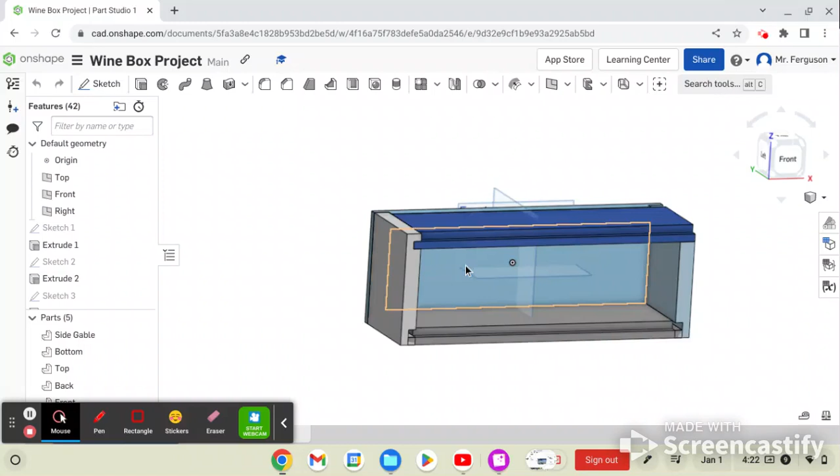So now that we've built all of our parts, we need to assemble our project together and make our assembly and then plan drawing. Let's go ahead and open the assembly tab down at the bottom. It's going to look like a new project, but it's just another tab.

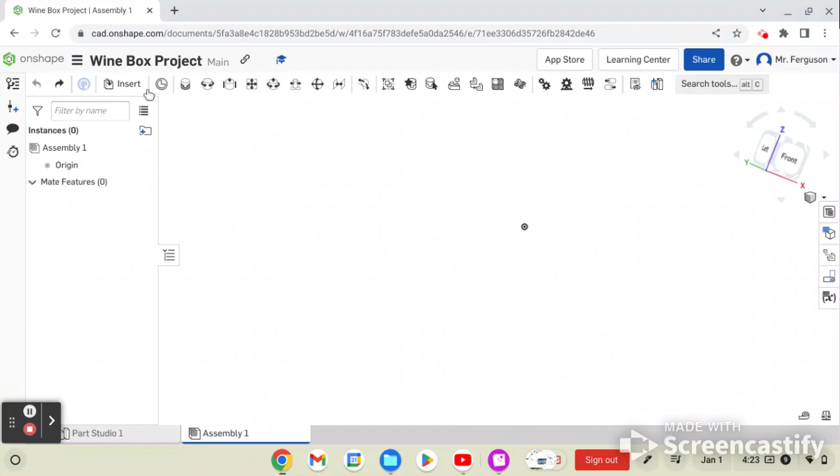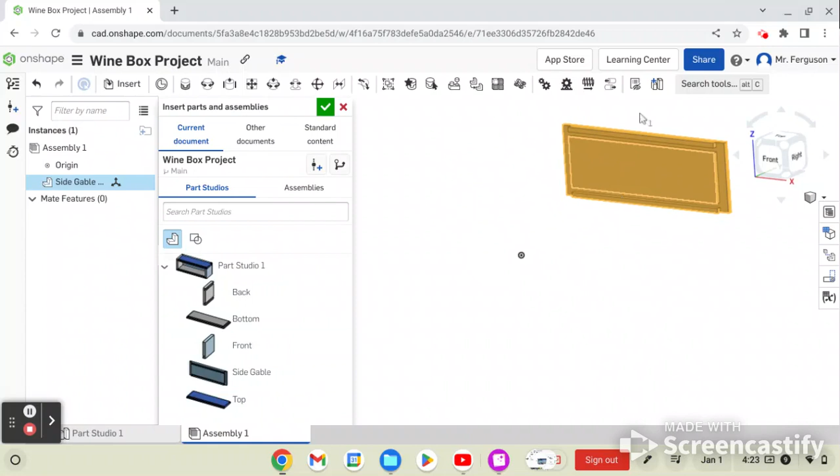To start with this, we'll go Insert, and then you will see all of our different parts we built. So we have our full part here that is from Part Studio, but we want to just manually click and then input them into this drawing. So I clicked once on the side gable, then I clicked again in there, and then I'm going to do another side gable. Doesn't really matter where you put them, space them out a little bit, but in the end, no big deal.

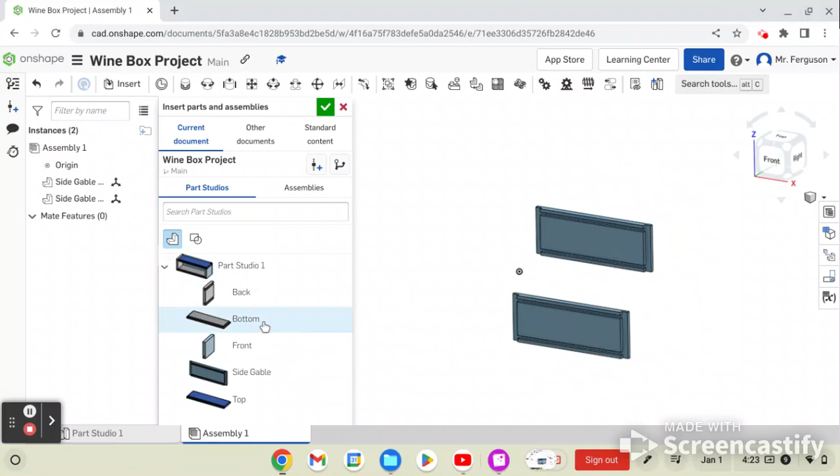So 2 side gables. I'm going to need a bottom. I'm going to need my top, back, and front. So now that we have them all in the assembly, we can go ahead and click the green check mark, and then we can start assembling them.

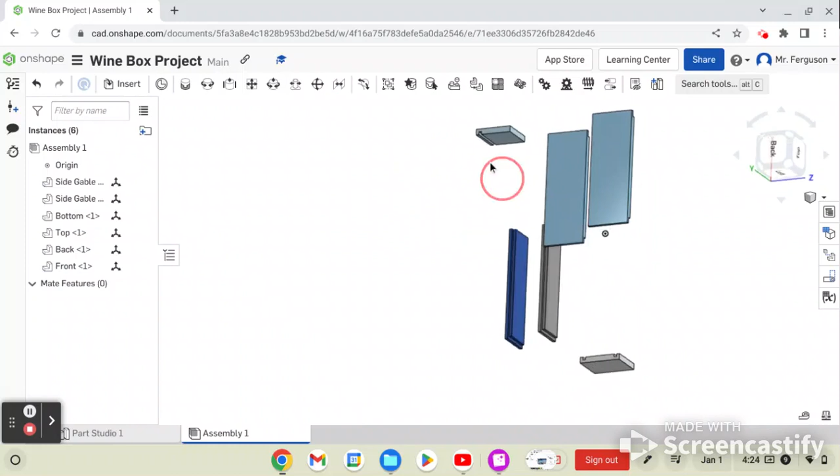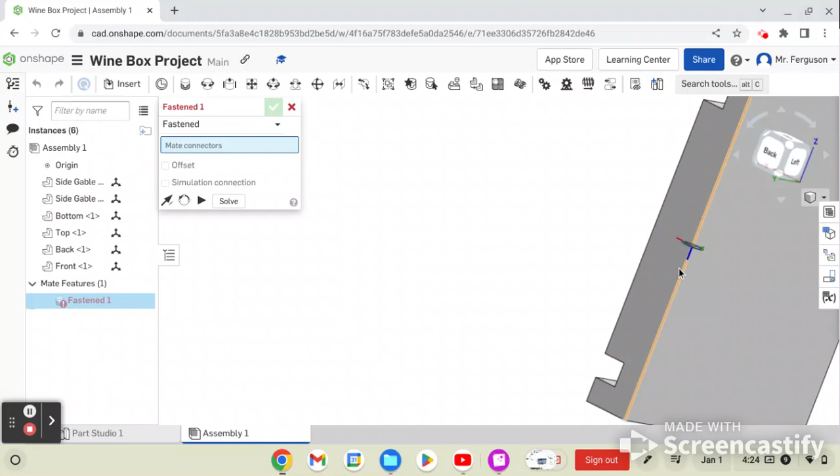So I'm going to start with assembling the side gable to the back piece. To do that, we click on the Fasten Mate up in the top left. It'll drop down that menu, and it's going to want you to select a point where you're going to fasten. So what we're going to do here is select exactly the center line. So that is the center line of our piece, or the center point. But we're going to want to make sure we're on the edge and not in the middle. So you can see that this has been selected on the edge and not there.

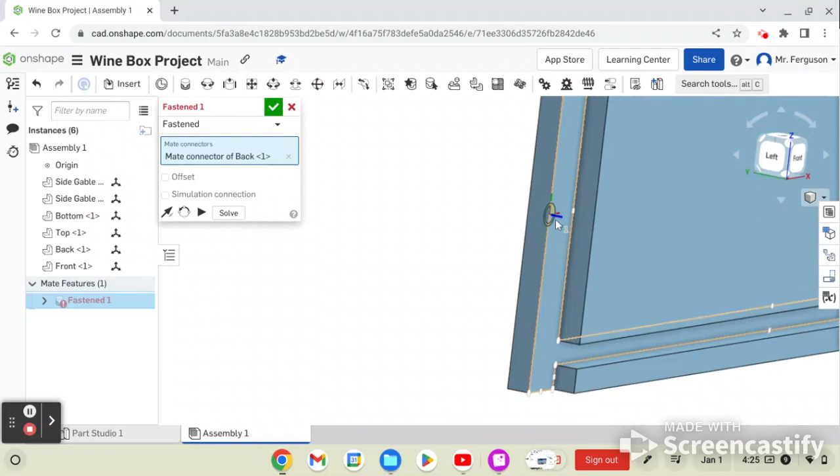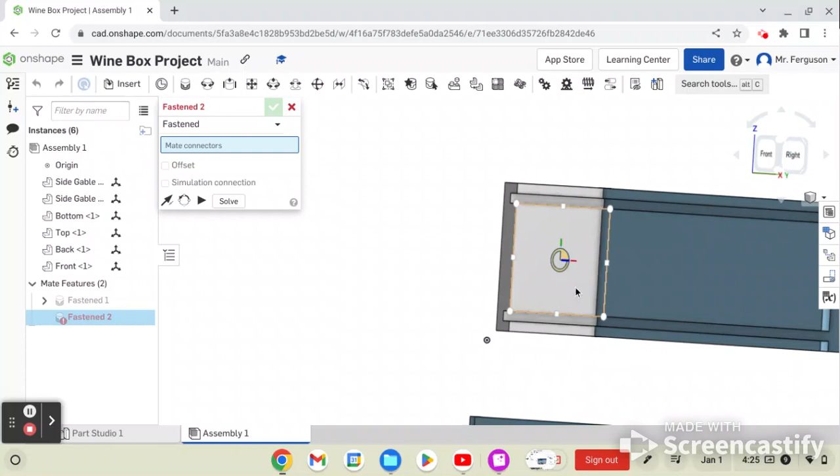So we're going to just zoom out. We're going to go up to our side gable, and you'll see that the same options pop up for this one. So we don't want over there, we don't want anywhere down here, we want this same edge, and then we click there. So that will bring both of our pieces to the center points, and with them being the same height, that equals the same measurements all the way around for our grooves and our rabbets. So that's our first one. We can click X. Second piece, let's do the top.

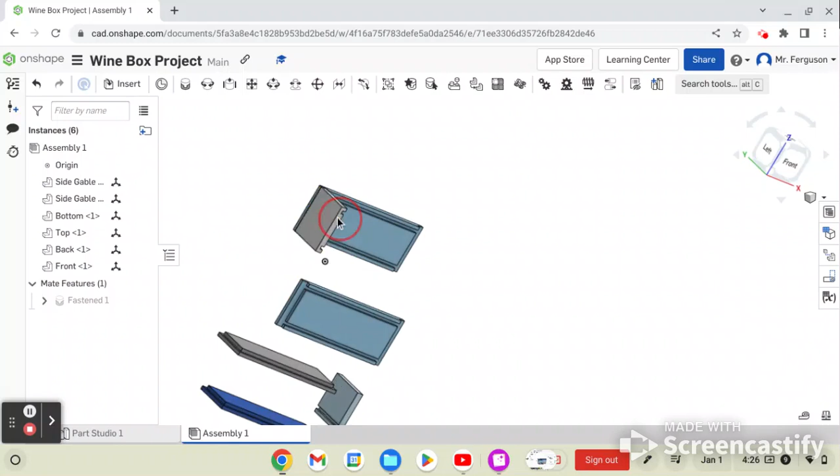So for this one, it'll be a little bit different. I'm going to go around. I'm going to want to connect it to the back part. So I'm going to go over here, click Fasten Mate again. And then I'm going to go directly in the middle of the top. But we're looking at it from the top view, so it's the bottom, but the middle part of it. So I click that once right there.

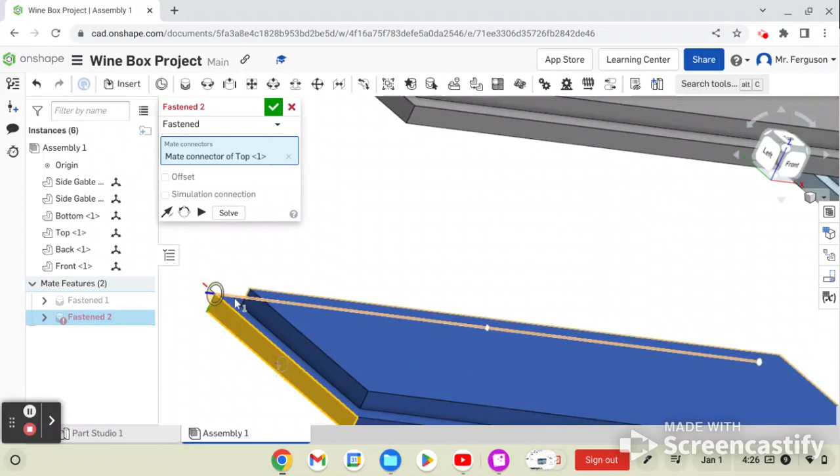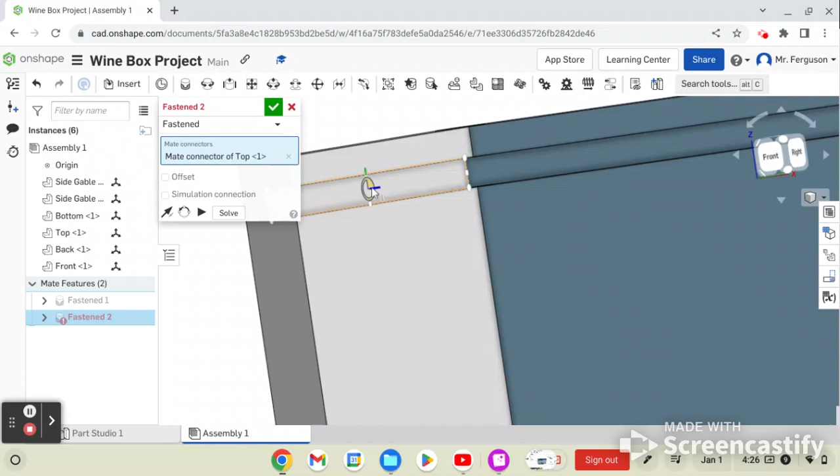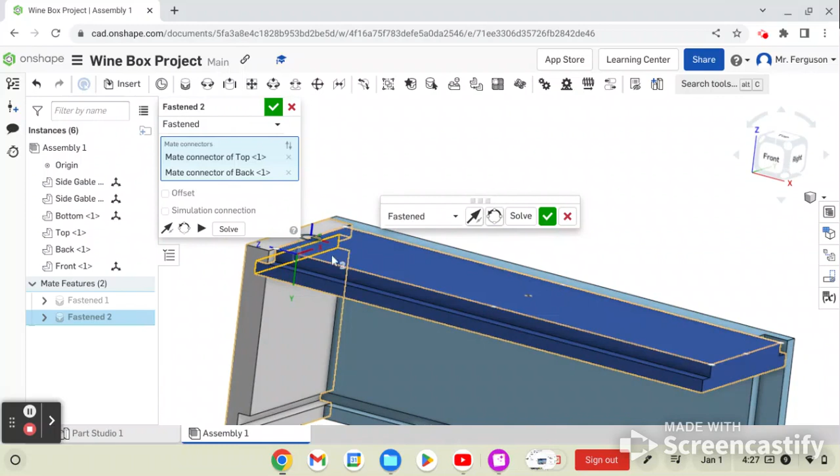And then going up to our back piece, we're going to find the same point to connect it to. So there is our center point of our piece, and it's connecting to the same face we want it to connect to. So the blue arrows both stick out to each other. So I'm going to click that, and then you will see that our lid fits perfectly inside of our side gable and our back piece. So there's a lot of just messing around and trying each face to try to get it to fasten together, but this is the fastest way that you're able to build your projects here.

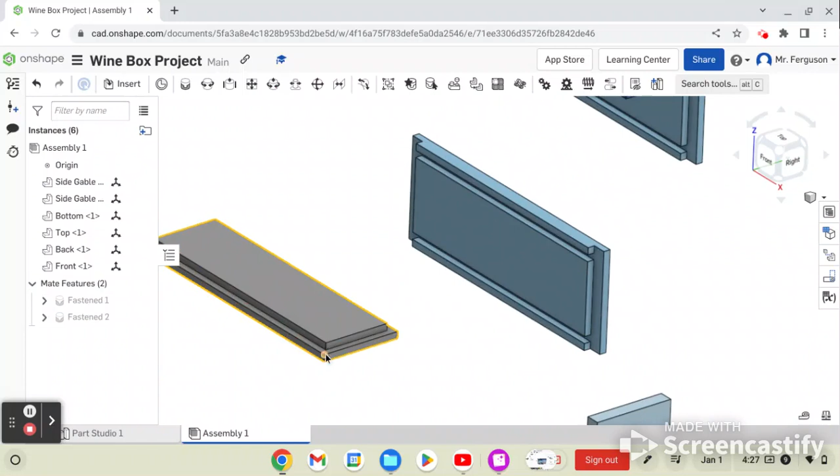So I'm going to do the bottom piece now. So I'll get out of that, click check mark. What's different about the bottom piece and the top piece is that I need to rotate this piece. So this edge here fits into our groove over here. So what I need to do is click on it, and then you'll see that you have all these different arrows and different commands here.

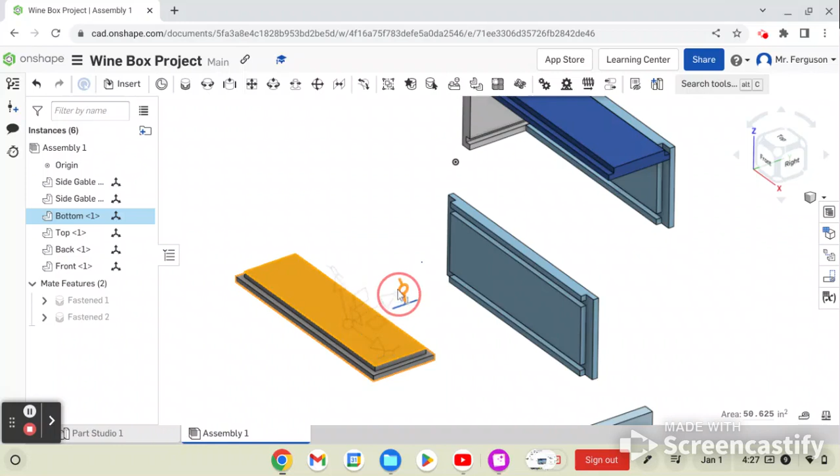So I'm just going to grab this. Looks like a circle with 2 lines on it. I'm going to drag it. I'm going to hold my mouse on it, let go, and then I will enter 180 and enter. So that's going to rotate it 180 degrees, basically just flipping it upside down. So now that we have that done, we can click out of

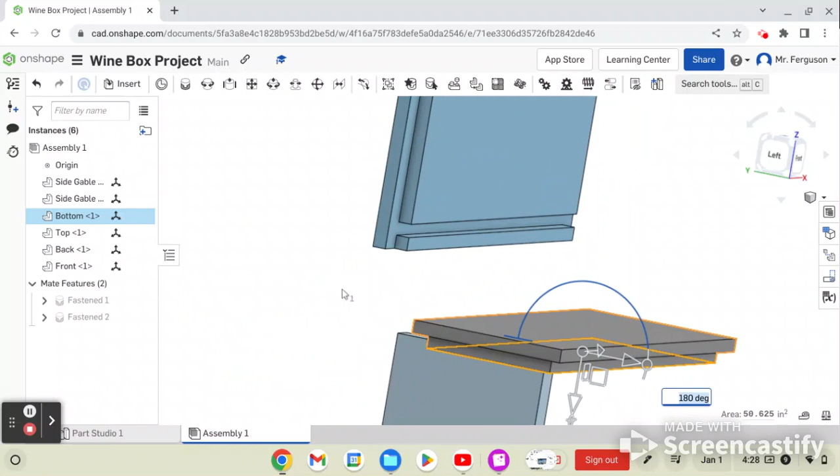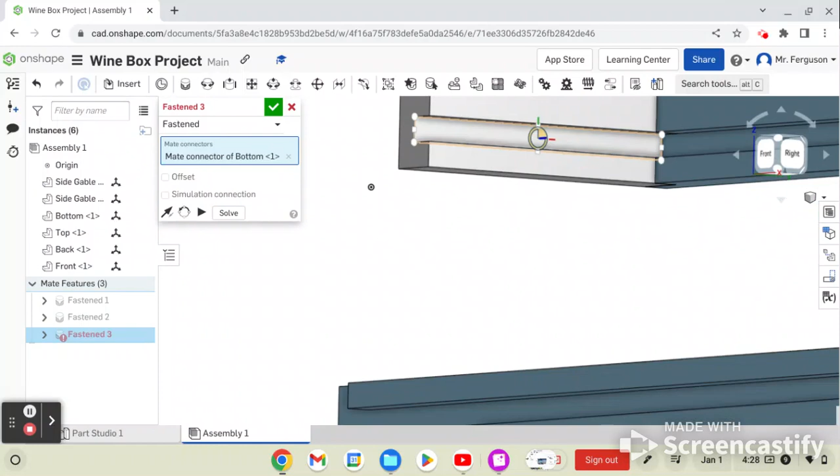the selection, go back to Fasten Mate, and select the middle of our top portion of it. By doing that, it's going to tell Onshape that we want to connect these 2 pieces to the centers and those 2 faces to each other. So as you see here, now when we look on the bottom, everything is flush and flat, and it's not the opposite way where when we built it, the pieces were flipped upside down.

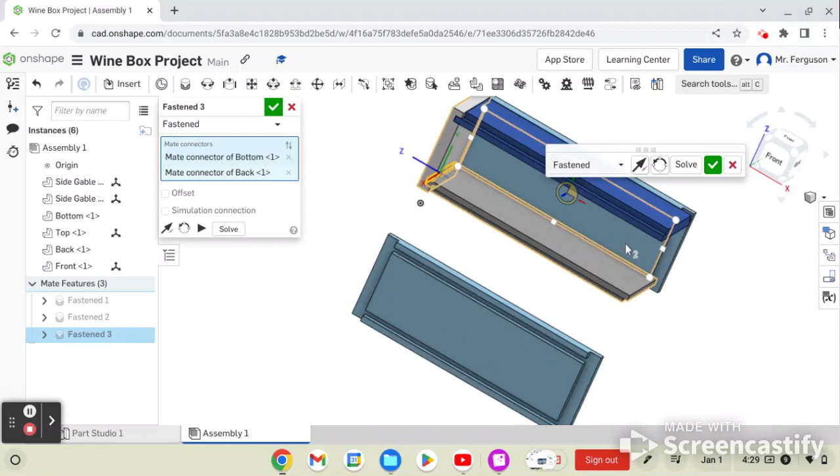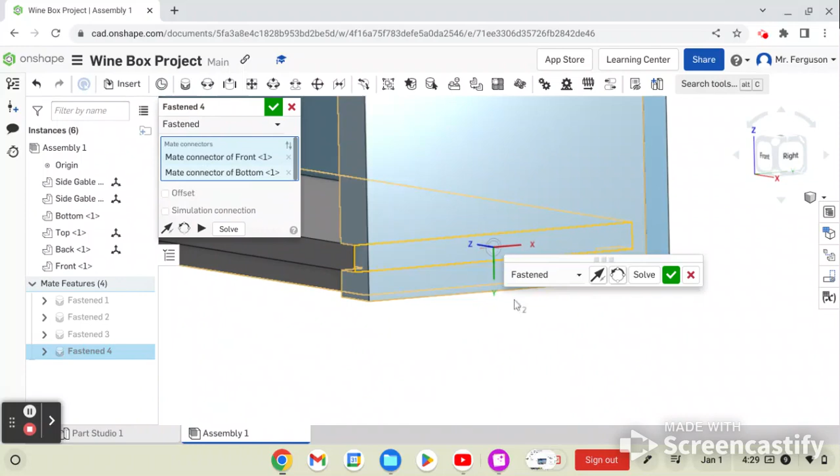So now that we have those 4 pieces connected, we're going to go to the front, and it's going to be the same thing. So we'll click check mark, go to this, Fasten Mate, center point to this one, and you will see that it is fastened the way we want it to there. So that's good. And now all we have left is our other side gable.

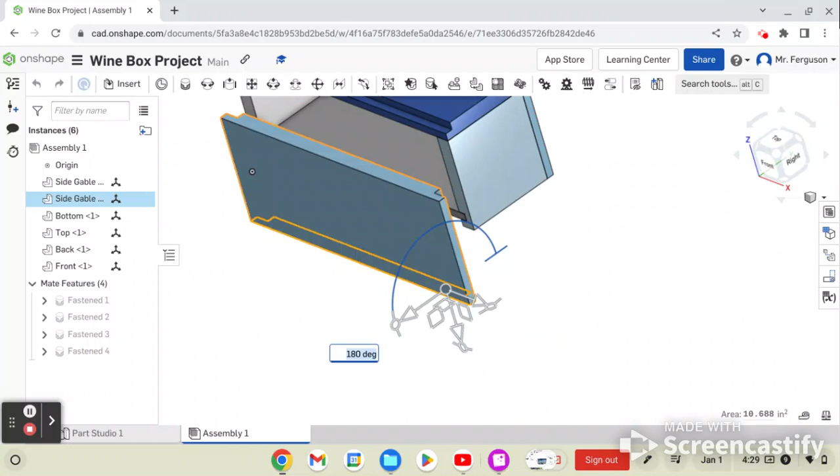So I'm going to click it again on the top part. I'm going to rotate. So I might have done it a little bit too much there. So I'm at 45 degrees, but I want to do it to 180 degrees. So again, you'll see that it's identical. The piece is identical to the first one we made, so there's no problems with it if we flip it. So again, we'll click out of that.

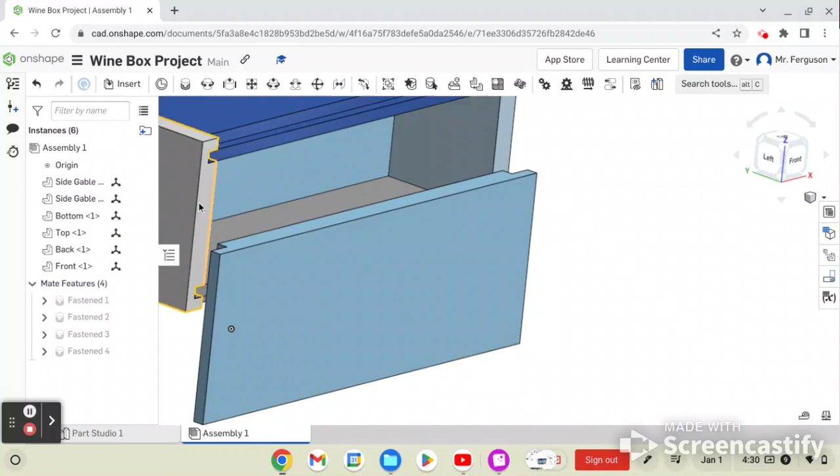I'm going to go to this back piece again, and we're going to do the same thing we did for the other side gable. I'm going to go to Fasten Mate and make sure we snap onto the edge, but the proper edge. So as you can see, oh, I got it right there. It's a little bit finicky.

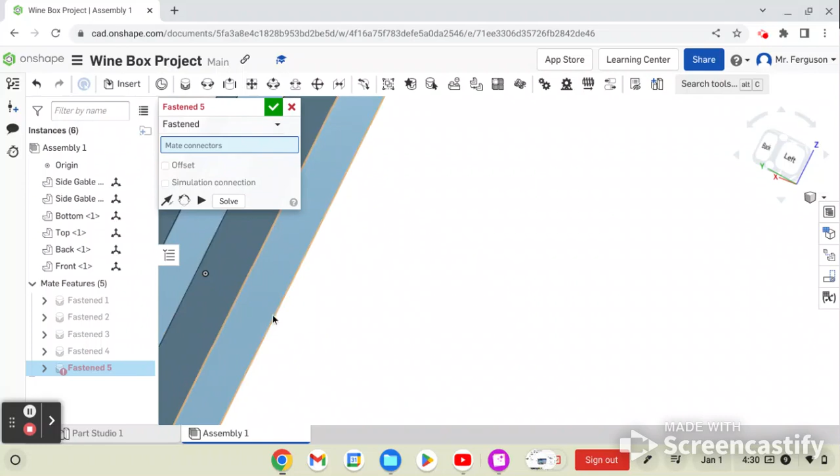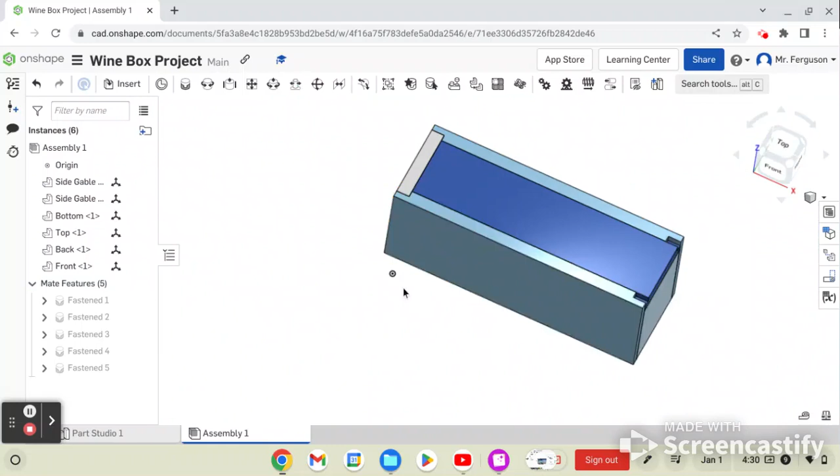We're going to go back up to this edge here, find the center. Oh, we had it, there we go. And you'll see that it is all connected there. So we click the green check mark, X out of that, and that is our finished assembled box. And in the next video,